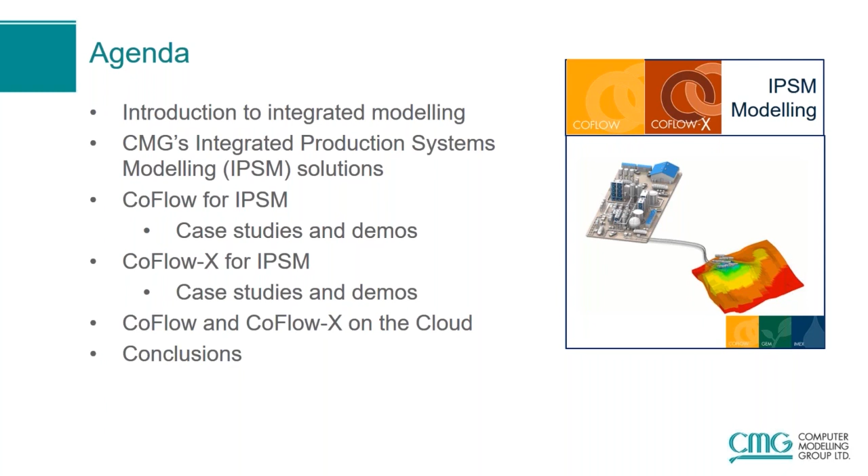I'll present the details of both those software to you, and I'll showcase some demos and case studies while I'm presenting as well. I will talk about the offering of CoFlow and CoFlowX on the cloud, and I will finish up with my conclusions. So first of all, we need to understand, why do we need to do integration at all? Why do we need to incorporate production engineering, facilities engineering, and reservoir engineering all together?

And the reason is that each of these disciplines cannot work in silo. We all need to pass information to each other and get the right data from one another, and then use that for making our production designs or reservoir recovery schemes. We need to transfer the right temperature, the right pressure, and the right fluid information to one another. And that is why we need to do integration. I'll explain this further in the next couple of slides.

So the question to you is, are you considering cross-disciplinary data for your predictions and results? So if there is a production engineer and they are doing an analysis to figure out what is the rate and pressure at which a well can flow at, they would make a plot on the screen. This is a typical plot that is used in an analysis called Nodal analysis. It's a plot between the flowing wellbore pressure and rate. And you can see there is a green line and a purple line.

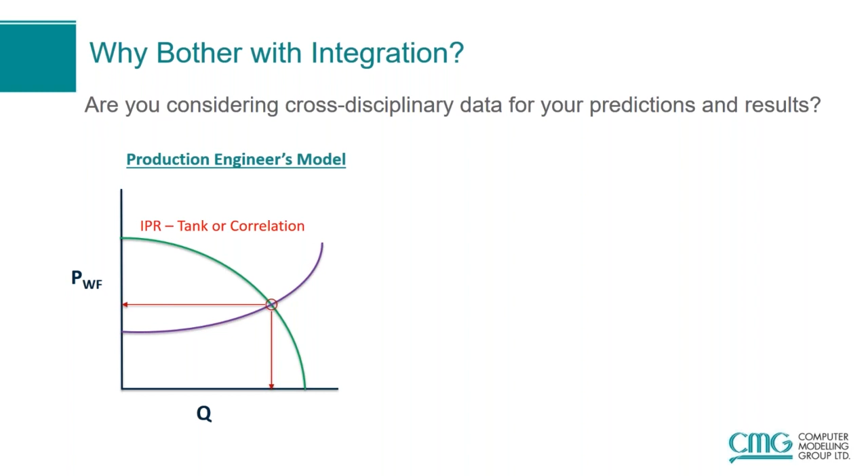The green line is the reservoir response that's coming from the reservoir, and it's called inflow performance relationship, IPR. The purple line is the lift performance that tells you how much your well can lift. So a production engineer would likely have a very accurate description of the purple line, but for the green line, they might be using a tank model or a simplistic correlation, which may or may not be completely accurate. The result of these two curves is the intersection point, and that is the operational point of your well. This is the rate at which the well will flow and the pressure at which the well will flow.

On the other hand, there is a reservoir engineer who is doing his reservoir simulation and coming up with a more accurate green line, the IPR line. But he or she might be using a simpler assumption for the purple line now, which is the lift curve. They might be using a constant BHP, or they might be using some lift tables that were generated for a specific situation of the life of the reservoir.

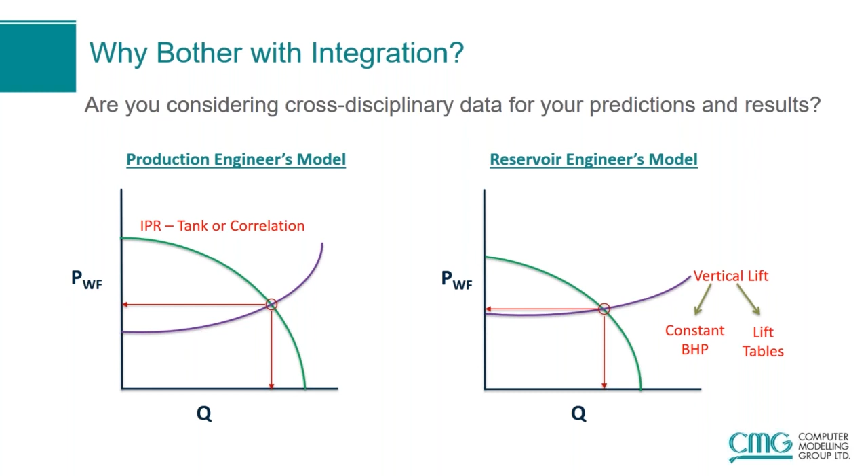So the purple line might not be completely correct. And as a result, the operational point, which is the intersection of the two curves, may not be completely correct. The only way to get the right answers and have some confidence in your forecasts is by integrating the two.

This is when you get your IPR curves from a physics-based model, such as reservoir simulation, and your purple line, which is your lift performance curve, should come from an actual well and facility model. And now you have a correct operating point, and this is what integration is all about.

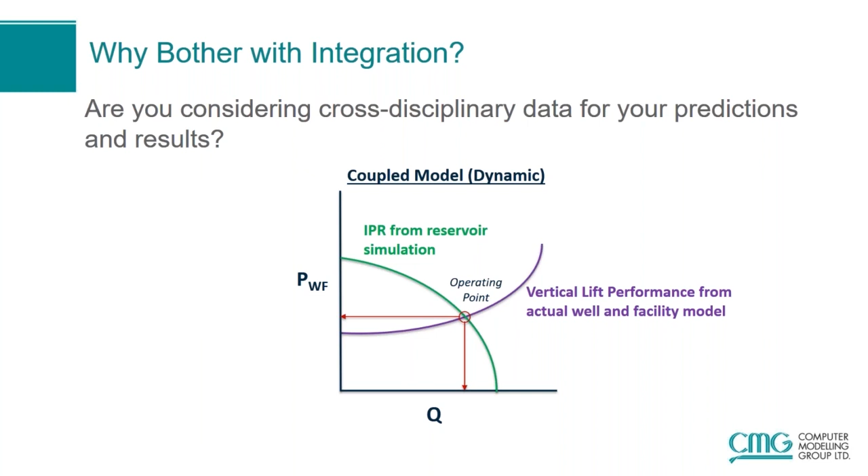So to do the integration of production and reservoir, CMG offers implicit and explicit solutions. Our implicit solution is CoFlow, and our explicit solution is CoFlowX. Depending on your situation, you would use either of the two software. If you want to have an implicit solution where all the solution, the reservoir equations, the well equations, the facility modeling, all of that you want to do in one single software, that's when you can use CoFlow.

It solves traditional challenges faced by other tools that are in the market out there to do IPSM modeling. It has fully integrated uncertainty optimization using CMOST, where you can parameterize anything and really do a robust optimization. And it has multi-fidelity, which means you can simplify anything you want in the whole system of IPSM. So that's CoFlow for you.

On the other side is CoFlowX, where you can just use a CoFlow system for your production modeling and couple existing IMEX and GEM models to it. It is very quick and easy, and you can leverage CMOST AI for a lot of uncertainty assessment and optimization. It is explicitly coupled, which means IMEX and GEM are talking to CoFlow in an explicit manner, and this leads to a very good performance. And of course, all of this is a single vendor solution for all your needs.

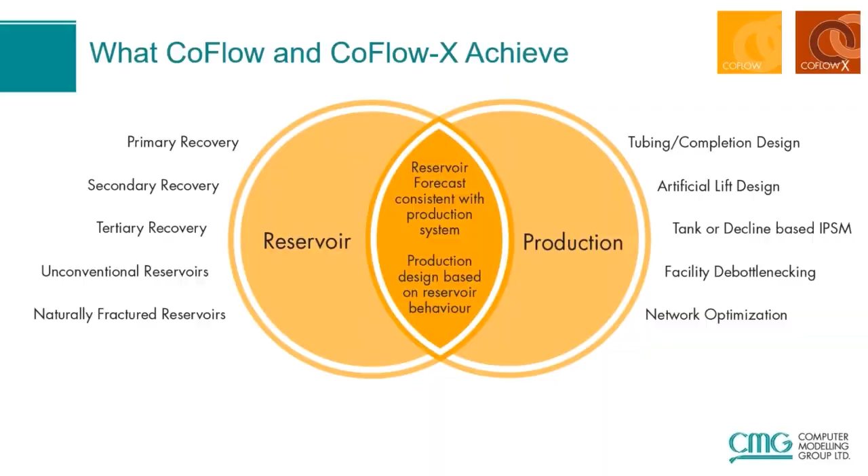So to explain in more detail, I'll go into CoFlow for the next few minutes. So CoFlow is CMG's solution for integrated reservoir and production coupling. It's an integrated modeling environment where multiple users can collaborate with each other. CoFlow was started as a joint venture between CMG, Shell, and Petrobras, and the objectives are to get better engineering decisions, especially for the high stakes plays. And by doing that, we can reduce the cycle time from concept to field.

We can encourage better collaboration between disciplines, and it's customizable software where you can very easily design workflows suitable for your own situation. And by doing all of this, ultimately you can accelerate and maximize your cash flows, and you can optimize your big investments in the field.

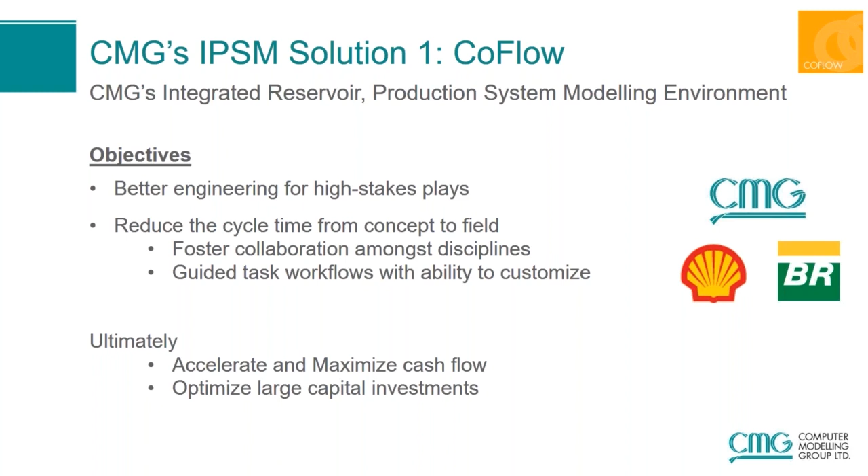We all know now that it's important to integrate reservoir and production systems, but it is not always so easy. It can be time consuming if you're not using the right tools. Typically, it is done by using multiple tools which are made by different companies. So reservoir simulation is on a different tool, production engineering is on a different tool, and the users are generally siloed. The communication between the various disciplines and the various tools is oftentimes ineffective.

There are data management issues where you have file and folder management and maintaining all these different infrastructures in one go. And there are issues with data consistency. For example, the fluid flowing from the reservoir simulator may not be exactly the same fluid that you are using in the production system. So there are issues with data consistency as well.

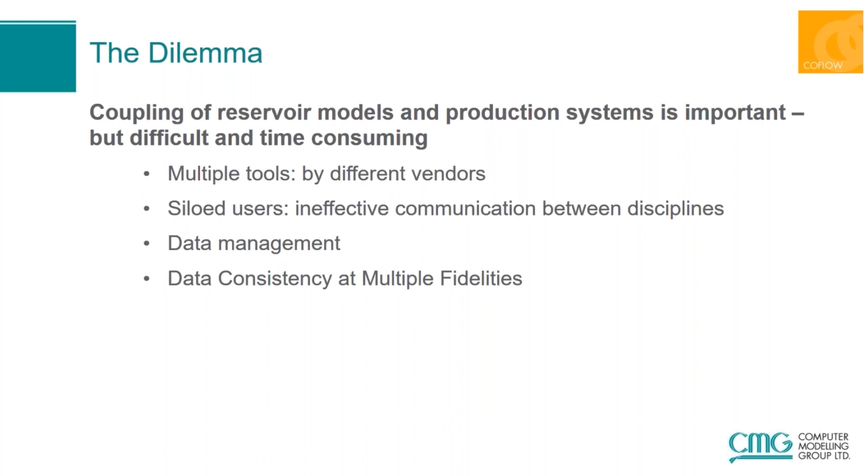So one of the reservoir engineers is using a black oil fluid in their reservoir simulation. Another one is using a K-value fluid. And then geomechanics people are also integrated. They can use compaction tables or real geomechanics. Production people also collaborate in the same system, where they can use the simple reservoir descriptions or use the full description coming in from the reservoir engineer.

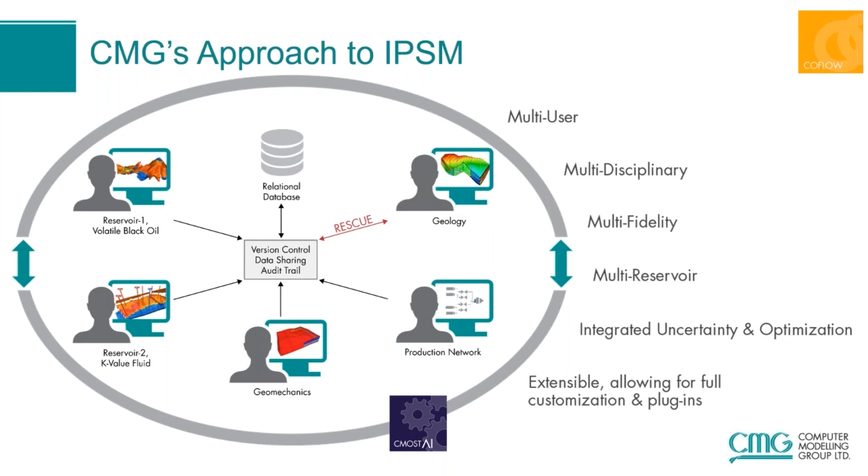And to top it all off, we have integrated uncertainty optimization, where you can parameterize everything from the reservoir to the production facility using CMOST AI, and then leverage all the things that come with CMOST AI. On top of that, CoFlow is an extensible software where you can write your proprietary plugins for your specific scenarios and make it work with CoFlow.

So I will explain more through a case study in CoFlow. This is a case study where we made a model for a pre-salt Brazil reservoir. There are two reservoirs in the system, a carbonate reservoir and a sandstone reservoir. The carbonate you can see on the right hand side is the shallower reservoir, which is appearing in the blue color for permeability. The average permeability is about 500 millidarcy there. It's a heterogeneous reservoir with multiple facies.

And then the bottom reservoir is the sandstone reservoir, which is a more homogeneous reservoir with a better permeability. And together, these two reservoirs have been developed using an FPSO-based development, which has a production limit of 150,000 barrels per day. And both these reservoirs have different fluid systems and different facilities as well.

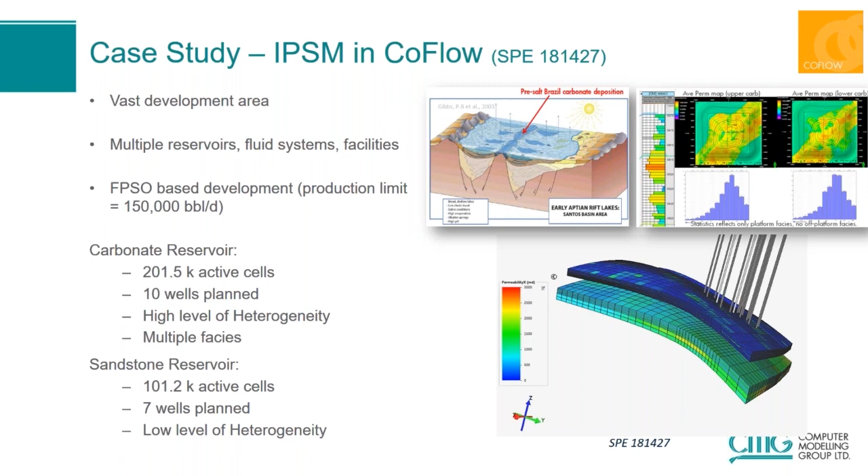So in terms of the fluid, you have the choice of using any fluid type in any of the reservoirs. So in carbonate, I can use EOS, K-value, or black oil fluid, and same thing in sandstone. Then I take this production down to the carbonate and sandstone networks, as you can see. So carbonate fluid goes to carbonate network and sandstone fluid goes to sandstone network. And again, you have choice of using any fluid type. In fact, you can use a black oil fluid in the reservoir and an EOS fluid in the facility if you want, or vice versa.

Then this fluid combines at the FPSO level, which is the red circle here. There, the two fluid systems are mixing with each other, blending with each other, and some processing is happening there. So there we have to use a model of fluid that combines the two fluid systems, and CoFlow does that automatically for you. So on the right hand side, I have the fluid description of the three fluid streams that are flowing in this whole system.

The red line is the sandstone EOS fluid. The dark blue line is the carbonate EOS fluid. And the combination of the two fluid systems is the green line, that is the blend of the two fluids. And this green line is going to be constructed by CoFlow in real time automatically, and you won't have to worry about how these two fluid streams are mixing with each other and how do I use the right properties for modeling my FPSO.

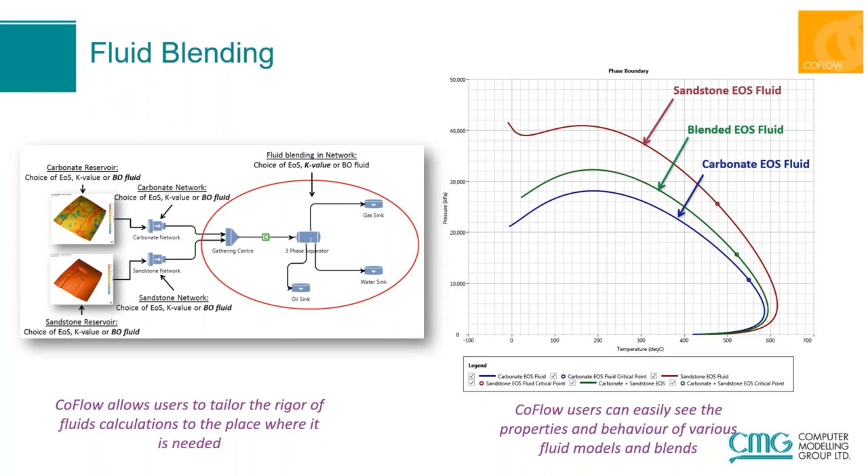Then the next thing you can do in CoFlow is well design and nodal analysis. In this study, we did intricate wellbore design by doing dynamic nodal analysis. In this picture on the right hand side, it's a plot of bottom hole pressure versus liquid rate, and that is coming from CoFlow's nodal analysis, where we are testing the effect of different wellhead pressures or top hole pressures and different tubing sizes. So the black dotted line is the IPR curve coming from the reservoir, and all the other lines are lift curves from the production side.

So you can see that if I use a lower top hole or wellhead pressure, I can have a significantly higher production from this well. And similarly, if I change the tubing sizes, you can see there are two groupings. The top groupings are for the top hole pressure of 25,000, and the bottom groupings are for the top hole pressure of 21,000. And within each grouping, there are three curves, corresponding to three different tubing sizes. So you can do a sensitivity and figure out what is your best tubing size that you can use in this development.

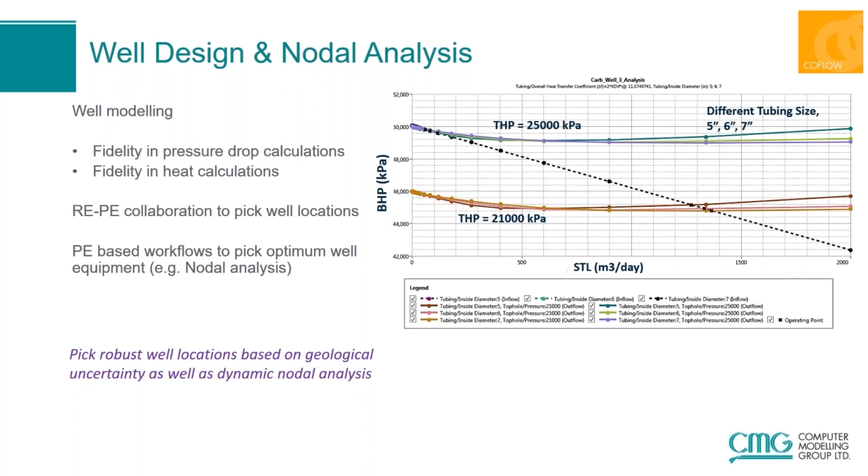Then you can do the facility design in CoFlow. In this particular study, we have carbonate wells flowing into carbonate facility only, and sandstone wells flowing into sandstone facility only. From the carbonate facility, we have a subsea gathering center. There are short pipes that are taking the flow to the subsea gathering center, and then there is a liquid riser that takes the flow all the way to the FPSO. On the bottom side, the sandstone wells, which have bigger productivity, flow into their individual pipes, but these pipes are actually risers that take the fluid all the way to the FPSO directly. So 7 sandstone risers and 1 carbonate riser in this development.

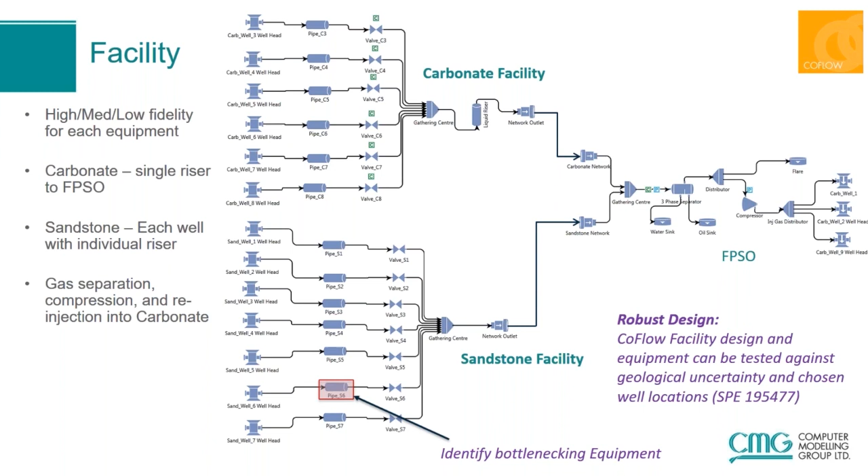So using CoFlow, you can identify bottlenecking equipment. For example, the pipe S6 here is a bottlenecking pipe, and you can try to do some debottlenecking by using a different pipe size and things like that. You can also do a robust design by incorporating geological uncertainty within your production design. So now I'm going to go to my CoFlow demo.

And here is my CoFlow model, the two reservoir system that you see. The shallow reservoir is the carbonate reservoir, and the deep reservoir is the sandstone reservoir. So this is the CoFlow interface for you. I can start from the left-hand side. You can see there are multiple users collaborating on this study. I have my asset study, and then there is this user, the name is demo. And then there are two more team members, Fred and Jane.

I can see what Fred is doing, and I can see what Jane is doing, and I can grab their information from their data that has been checked into this database. So whenever you are working in CoFlow and you're happy with what you're doing, you can check in your results, and your team members can then see the results. And it doesn't matter where the team members are. Fred can be in South America and Jane can be in Europe, and I can just work together with them very easily. I can also give permissions to various people to just view the studies or write permissions and so on.

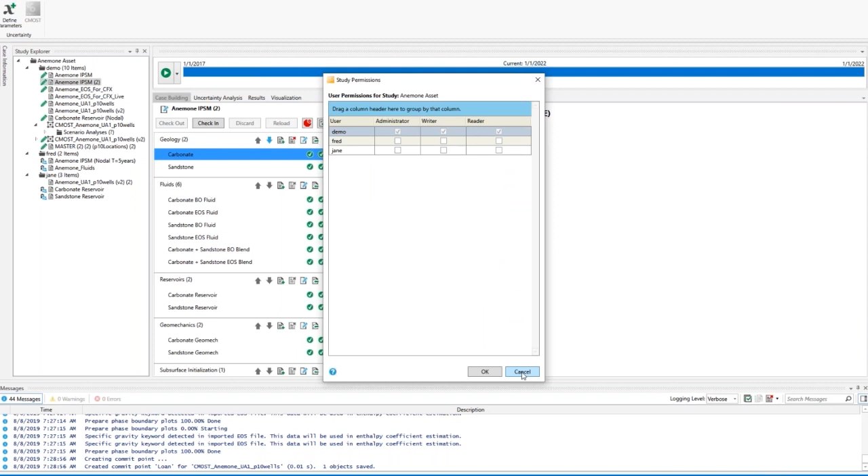So first thing you see in CoFlow is your geology. You've gotten the geological model and everything is set up correctly. And then you go and design your fluids. In terms of fluid, CoFlow can handle every single fluid system. You can have black oil systems, K-value systems, or equation of state systems. In this case, Fred has done some work on fluids. So you can see he has designed the black oil fluid system, the EOS fluids, and the combination of the two.

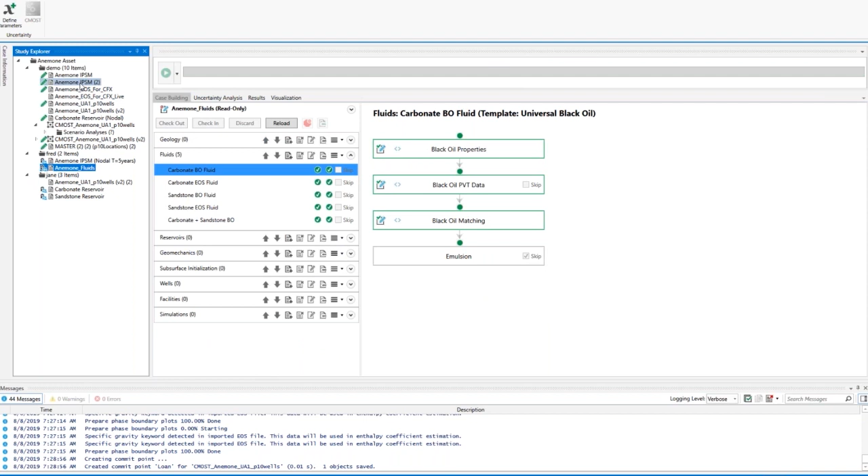I got that information from Fred. So now I have a carbonate fluid described in black oil format as well as compositional format. And same thing for the sandstone fluid. And then I have created blends of the two fluids, the carbonate and sandstone black oil blend and the carbonate and sandstone EOS blend. And then I can go and look at the quality of my blends.

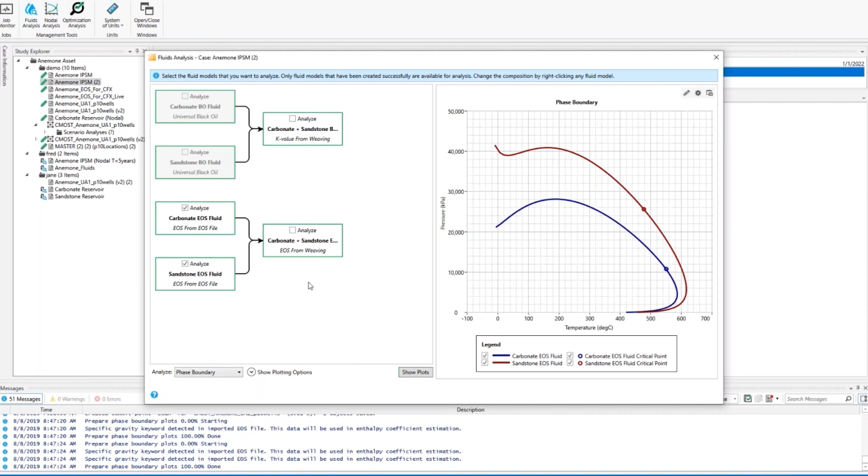So here is my carbonate EOS fluid PT phase envelope, and the sandstone EOS fluid PT phase envelope. And if they were to mix in a 50-50 ratio, this is how the combined fluid would look, the green line that appears. And this green line will be managed by CoFlow in real time automatically in the facilities, depending on what ratio the two fluid streams are coming into the facility.

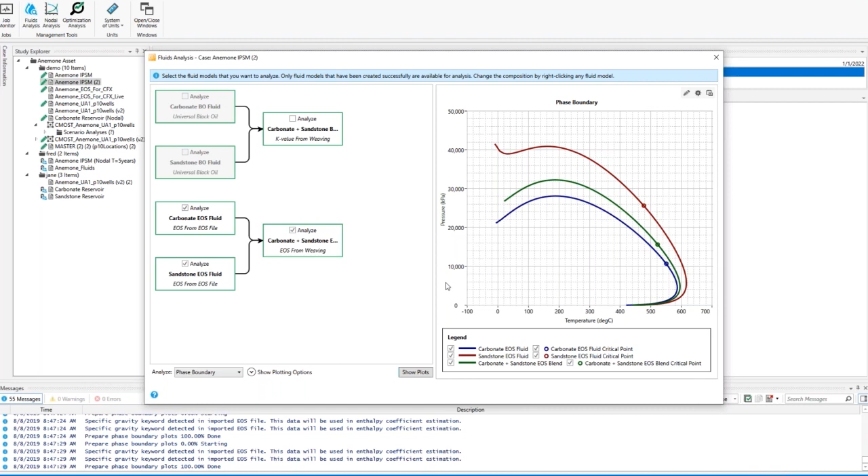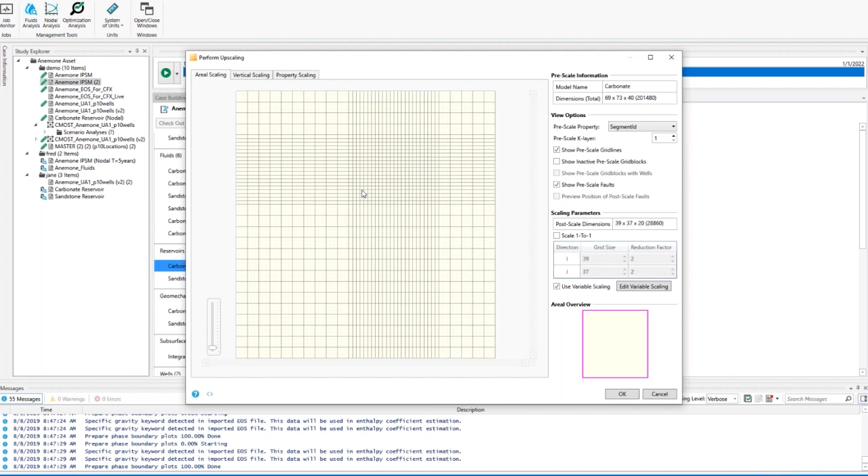Then I go ahead and do my reservoir engineering. I set up my reservoir model. And one good thing about CoFlow is you can simplify the reservoir model or you can use it at the full resolution. So you can use a discrete reservoir or you can use tank and decline curves. Or you can take the base refined model coming from the geologist and upscale it within CoFlow. So here you can see I have upscaled my reservoir everywhere except the area around the wells. So the central area is not upscaled, but the area away from the wells has been upscaled.

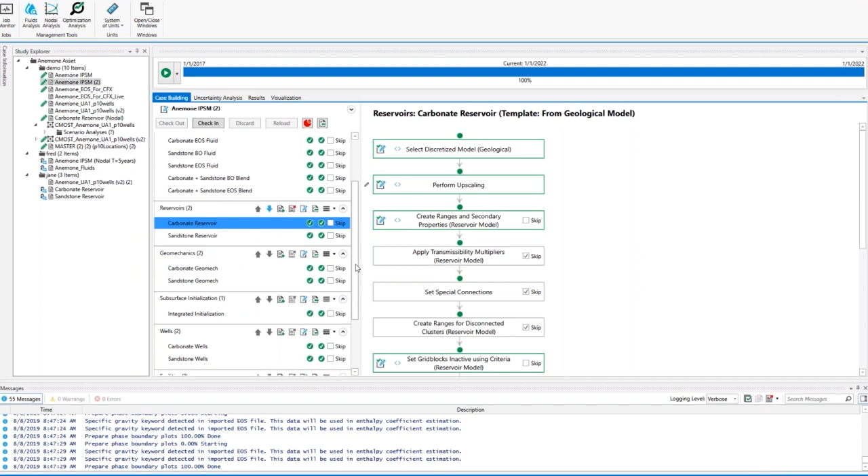And then I can go ahead and do geomechanical modeling, which is compaction tables or full geomechanics, and then set up my wells. So my wells can be described in all their details. I go in and I specify the type of wells and where they're located and other properties in the wells as well. Here, one thing that would stand out is this table at the bottom. This is the ambient temperature table. That's the temperature outside of the well, below the sea floor. So this gives me the ability to do correct modeling of temperature losses, which is very critical for the offshore environment.

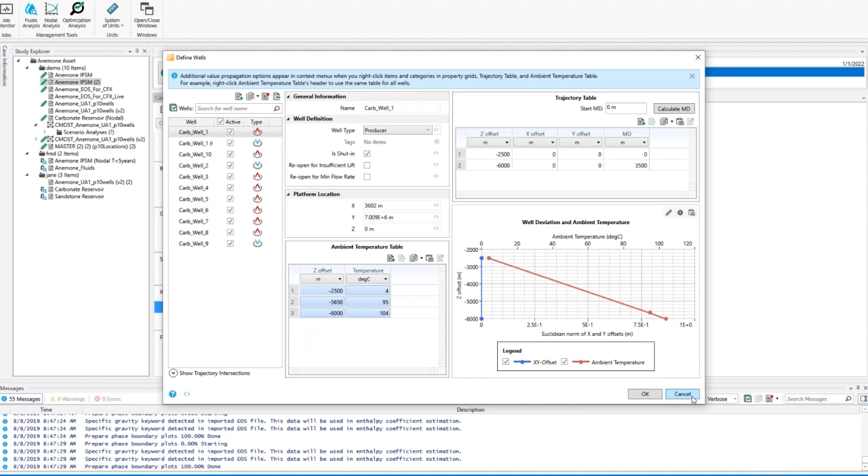In terms of the tubing size, the size chosen is 6 inches, and that is done based on nodal analysis. So I'll show you that next. So that was done by grabbing the carbonate reservoir model from Jane and then running nodal analysis on that. So you go to nodal analysis and you generate one and evaluate tubing sizes and top hole pressures.

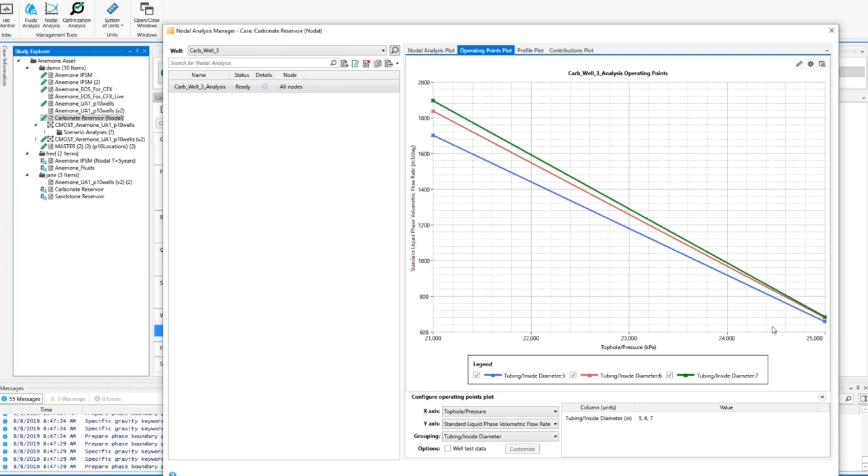But if you just pick one top hole pressure, for example, 21,000, you can see that the production can increase from about 1700 to maybe 1850 using a 1 inch bigger, like 6-inch tubing instead of 5-inch tubing. But going from 6-inch to 7-inch doesn't give you that much of an increment, and 7-inch can be much more expensive than 6-inch. So we decided that we will go with a 6-inch tubing for our base design.

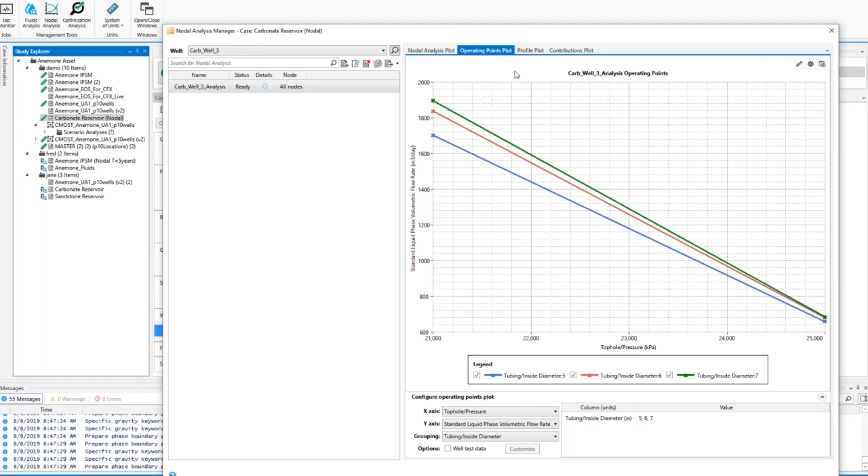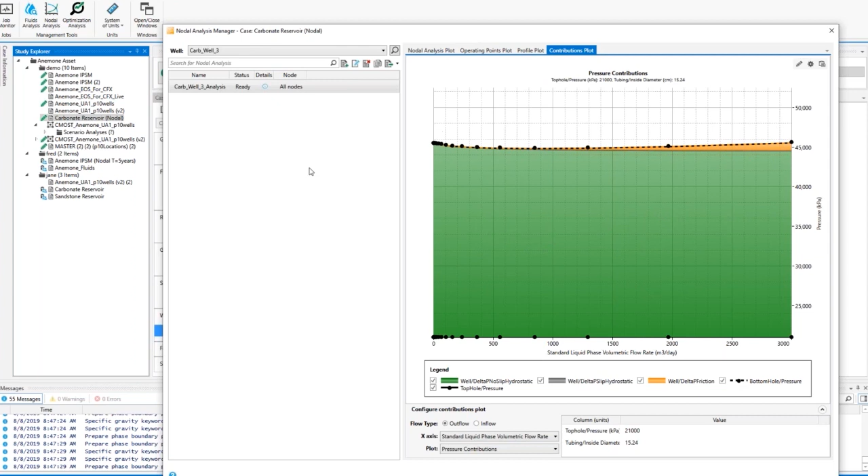You can also look at the contributions of pressure coming from various sources. So this picture shows you that most of your pressure drop is coming from hydrostatic, because these are mostly vertical wells, and some of the pressure drop is coming from friction. So based on this, we conclude that we will be using 6-inch tubings for all our wells.

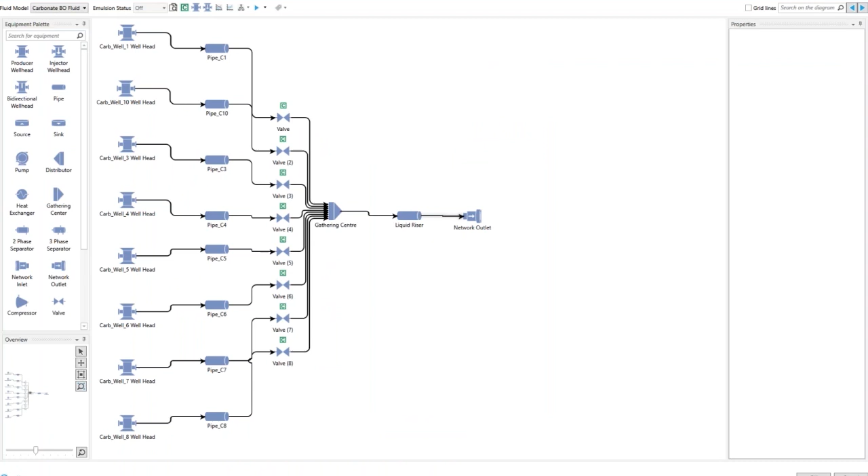Continuing on to the facilities, we have the Carbonate facility, where you have individual wells flowing into small pipes and then subsea gathering center, and then the fluid goes into a liquid riser. So let's look at the riser. The riser here is a J-shaped pipe, and again, you're doing all the pressure drop calculations and all the temperature drop calculations right from the sea floor to the FPSO.

So the water depth is about 2.5 kilometers, and this particular well is located about 700 meter horizontal distance from the FPSO. At any segment in the pipe, you can change your correlation and use a different correlation if you want. There is a choice of correlations available to you in CoFlow.

On the sandstone field, each pipe taking the fluid from the well to the FPSO is a riser. And the shape is a bit different because it's a longer riser, and you have to account for the weight of the pipe that's applied onto the FPSO. So we use a lazy wave profile. And once again, all the pressure drop calculation and all the temperature drop calculations have been done.

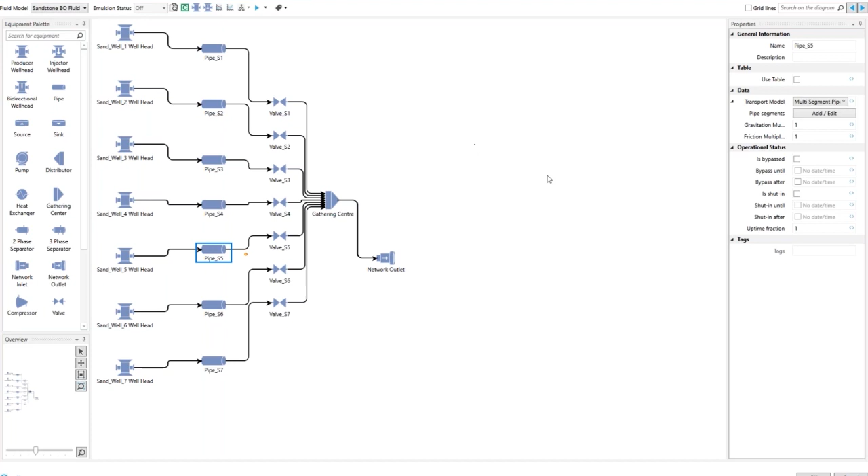So one thing to notice is the fluid model being used in sandstone facility is sandstone fluid, and in the carbonate facility is the carbonate fluid. So in the integrated facility, that is the FPSO, the fluid is the blend of the two fluid systems. And the properties of this blend are going to be calculated in real time by CoFlow, and it will be automatic.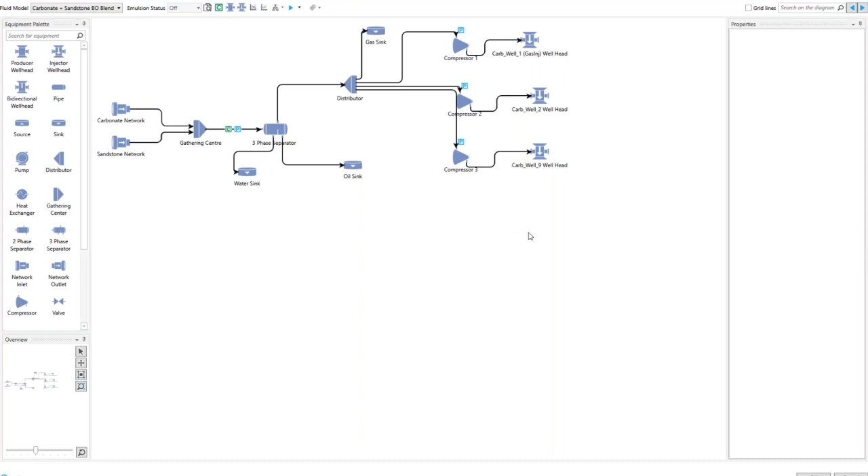In the FPSO, what we are doing is we have a single stage separation. We have a constraint of production, and we are separating the water and oil and then sending the gas to a distributor, where some gas goes to sales and fuel and flare, and remaining gas is sent to injection wells using compressors. Okay, so that is what we are doing in this study, and we are doing an optimization as well.

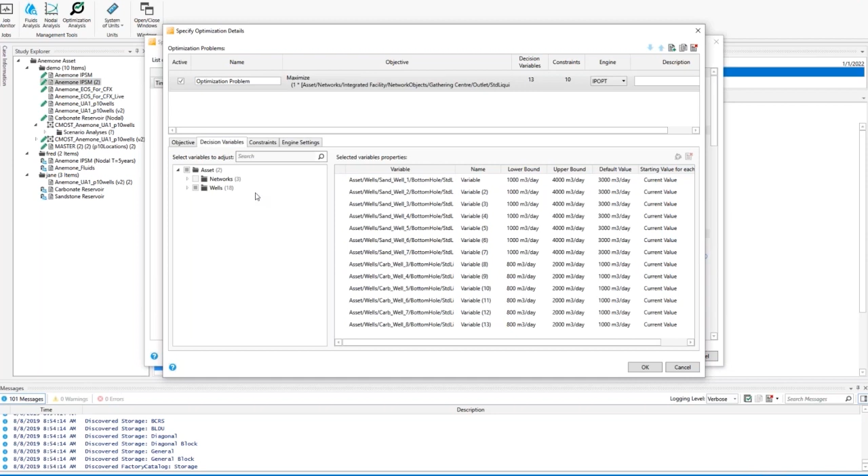So in this particular study, we want to optimize our production that's coming in at the FPSO. So I'm trying to maximize the liquid production or the oil production at the FPSO using a decision variable on my wells. So I'm going to produce my wells at a particular rate that is determined by the optimizer, such that I can elongate the life of the well and life of the field and just maximize the production to the maximum capacity of the FPSO.

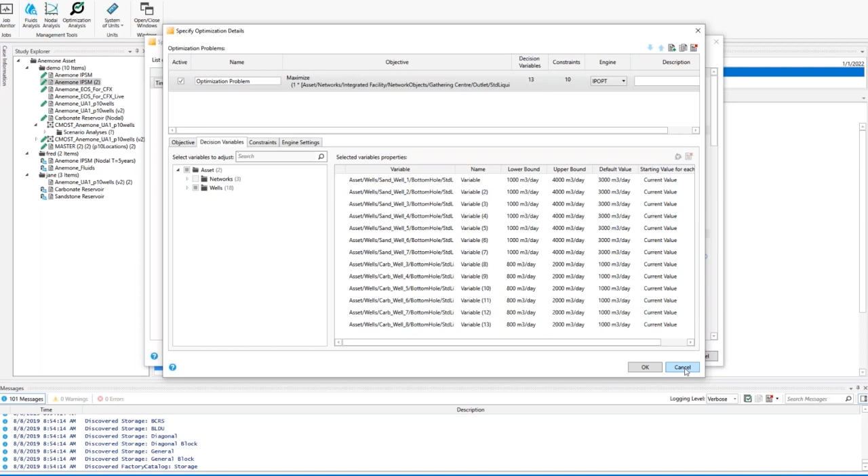So this optimization is going to be done as often as I want. I can do it every month, I can do it every 6 months. And then we can look at the results within CoFlow as well.

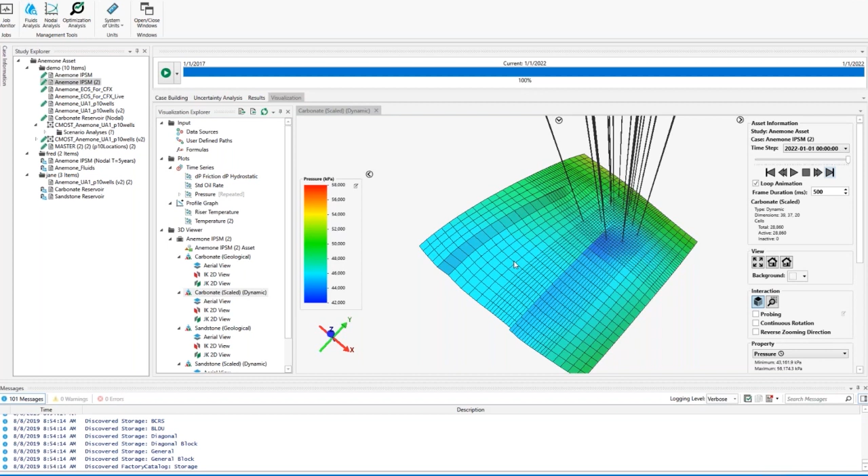So let's look at the geological model of Carbonate, and you can see that it's a low permeability system, and you can see the refinements on the grid here, and the dynamic model, which is after upscaling. You can see that it's been upscaled in the areas away from the wells. And you can see that the pressure drop is quite significant around the wells of Carbonate, so that's why we are doing a gas reinjection scheme.

In terms of results, you can look at the oil rate coming from the two facilities. So the Carbonate facility is only producing about 5 to 6,000 meter cubes per day, and Sandstone facility is producing about 18,000 meter cubes per day. So most of the production is coming from Sandstone and some from Carbonate. So maybe 30% is from Carbonate.

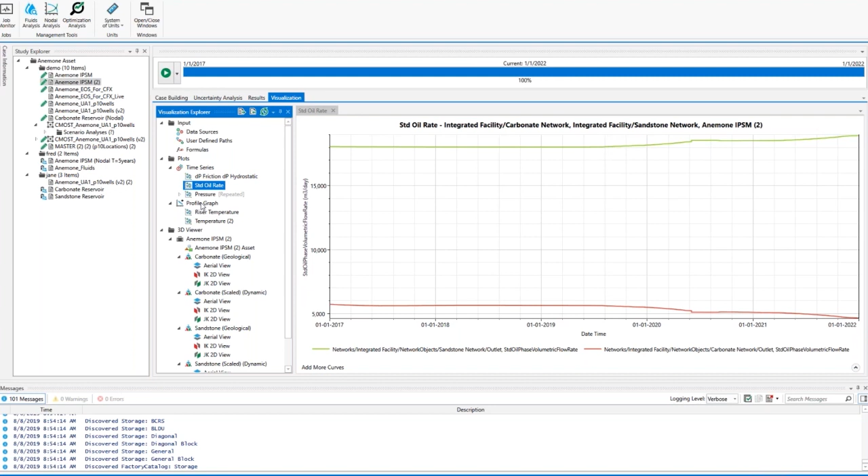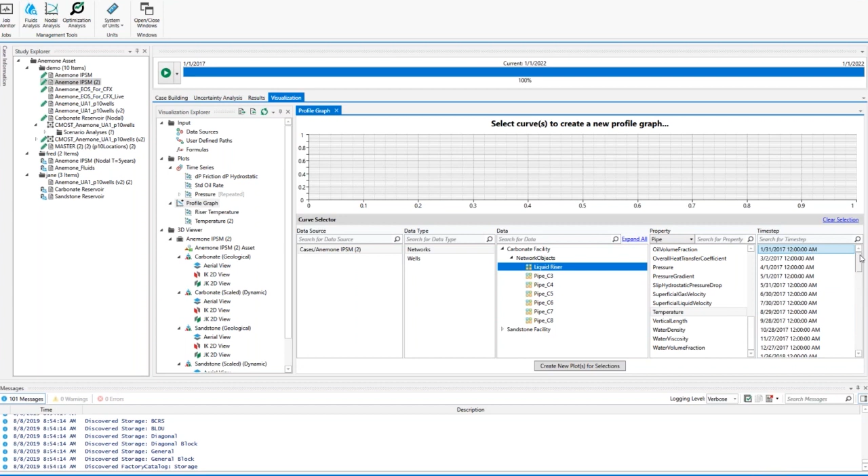You can look at some flow assurance properties. So you can create a profile of the temperature inside your Carbonate riser. And that is very important because you don't want to get into low temperature systems where hydrates and asphaltenes can deposit. So I'm going to plot temperature inside this pipe at 3 different times, one at the beginning, one sometime in the middle of the simulation, and one towards the end.

And CoFlow will create this plot for you, and then you can evaluate how the temperature is varying inside the pipe. So on the x-axis is the length of the pipe, on the y-axis is temperature inside the pipe. And you can see we begin at a fairly good temperature, about 52 degrees Celsius at the sea floor. So remember, the wellhead is at the sea floor. It's a wet wellhead. And by the time 2,500 meters or 3,000 meters are done, which is at the exit of the FPSO, the temperature has dropped to 34 degrees.

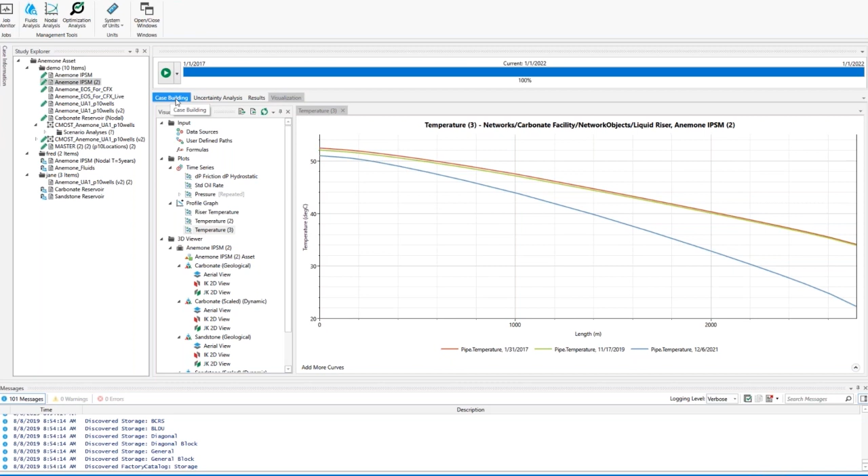So that goes on for the first couple of years. But in the 4th year, we can see the temperature has dropped quite a bit at the FPSO. So it's 22 degrees now at the FPSO, and that's a little cool, and it can lead to asphaltene and wax problems. So basically, CoFlow can use these results to do some action and prevent the temperature from dropping too much. So that is all you would do in CoFlow, and our base case has been created now. So I'll go back to my presentation, but before that.

Before Varun goes into the next session, I'd like to ask a question to the audience. Soon you'll see a question pop up on your screen, and you can select one of those options and click respond. So the question is, what are your main challenges while doing IPSM modeling? The options are data consistency between reservoir and production models, difficulty in coupling reservoir and production models, lack of ease of data exchange across disciplines, and all of the above. We'll give a few seconds for everybody to respond. And the responses are coming right here.

Around 18% of the people who responded believe that data consistency between reservoir and production models is an issue. Around 20% say coupling is difficult between reservoir and production modeling tools. Around 15% say lack of ease of data exchange, and the majority say it's all of the above. And I agree. Depending on the tools that you're using and depending on consistent data usage between different disciplines, and one of the most important ones is the fluid consistency used between the reservoir models as well as the network models, or the well analysis models.

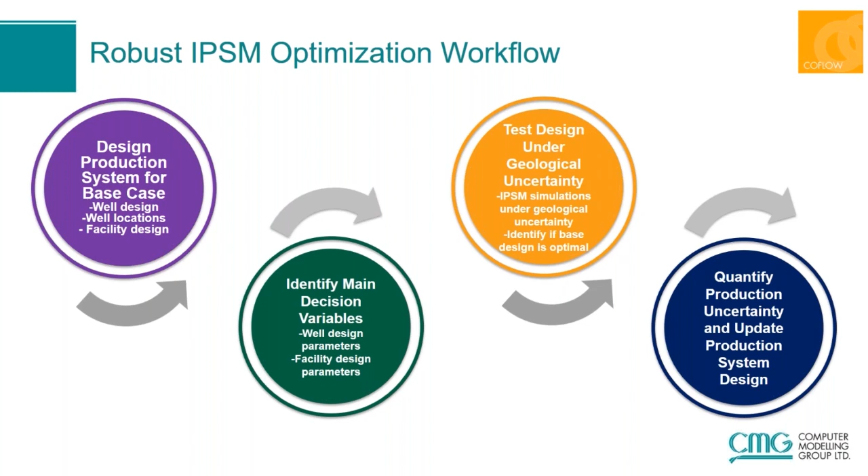But we can only pick one when we go into the field. So which one do we pick? So that's another question to ask. Then the tubing ID and tubing insulation, we tried to identify that using nodal analysis and we picked a 6-inch tubing size. But is that optimal for all the uncertainties that there are? Do we need artificial lift? Should we try using a pump or should we just leave the wells to flow naturally?

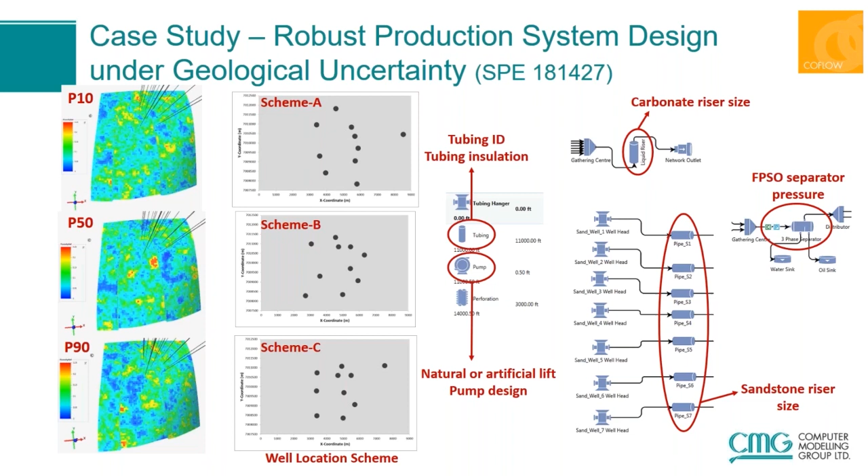Then on the facility side, the carbonate riser size can be uncertain. We can try different riser sizes for different geological realizations and see which one is the best. And same thing goes for the sandstone riser size. And lastly, the FPSO separator pressure has been picked as a starting point for one realization. But does it work for all the realizations or not? So we can do all these analyses in CoFlow. And that is my next demo.

So what I can do in CoFlow is I can very easily bring in geological realizations that are coming from geologists and set them up in CoFlow and then set up my reservoir model accordingly. And then within the wells, I can parameterize the entire reservoir. So instead of associating the well with realization 1, I can do it to realization 2. So I'll show you an example of carbonate well 10 here. You can see that this particular perforation corresponds to the carbonate P90 realization. And at the same time, all the wells in carbonate are corresponding to the carbonate P90 realization.

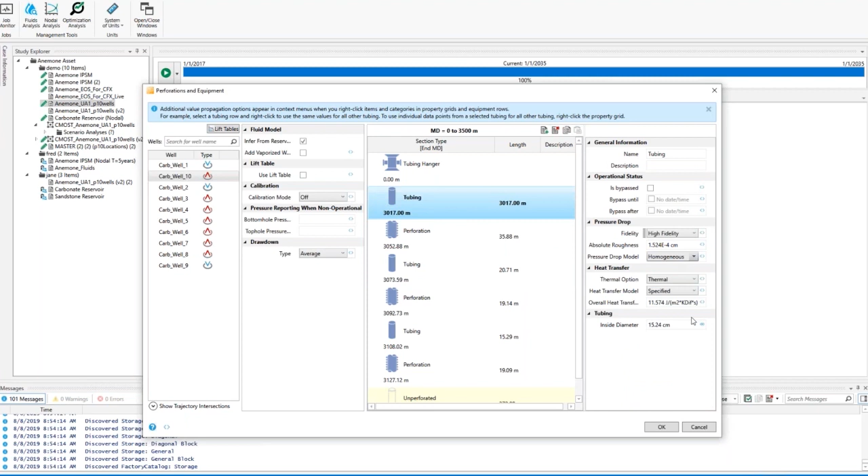But I can parameterize the whole reservoir. And I can say that I may not be using the P90 realization. I may be using P10 or P30 or P50 or P70 or P90. I gave them equal weightings because I don't know which one is better. But if you have some distribution which you want to use, you can use that just like you would do it in CMOST. So my entire reservoir is a parameter and all the wells would be using one or the other reservoir when we do optimization analysis in CMOST. Similarly, my tubing size is a variable that I can test. I have a choice of using 6-inch, 5-inch, or 7-inch tubing sizes.

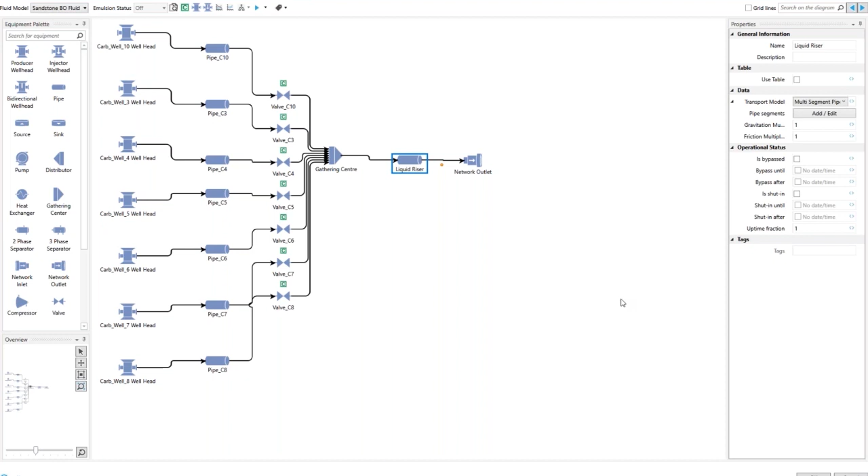Then I go ahead into my facilities and I parameterize my entire facility as well. So in case of the carbonate facility, I can make either one of the equipments a parameter, or I can parameterize the whole system. I am not forced to use a single gathering center facility, for example. I can completely change my facility and use that as a parameter. In this case, I have parameterized my liquid riser size. So I'm using 6-inch carbonate riser, 8-inch carbonate riser, and 10-inch riser. And I can specify the whole facility diagram as a parameter.

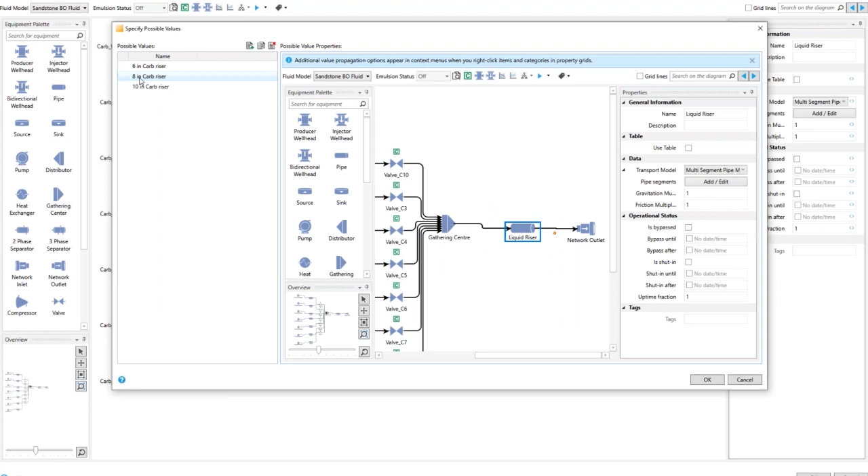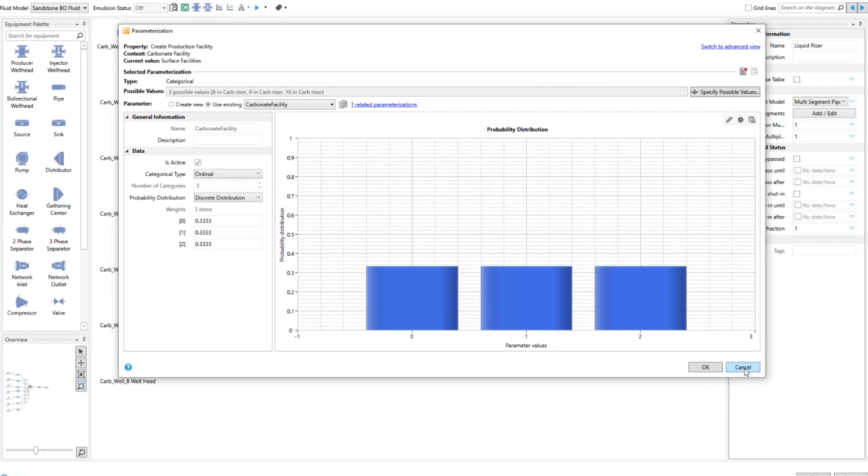So here you can see that I'm using a different liquid riser size for each realization. This is the 8-inch that's coming up, and you can see that it's 8-inch diameter here. So we have 3 different settings for carbonate riser that we are testing out.

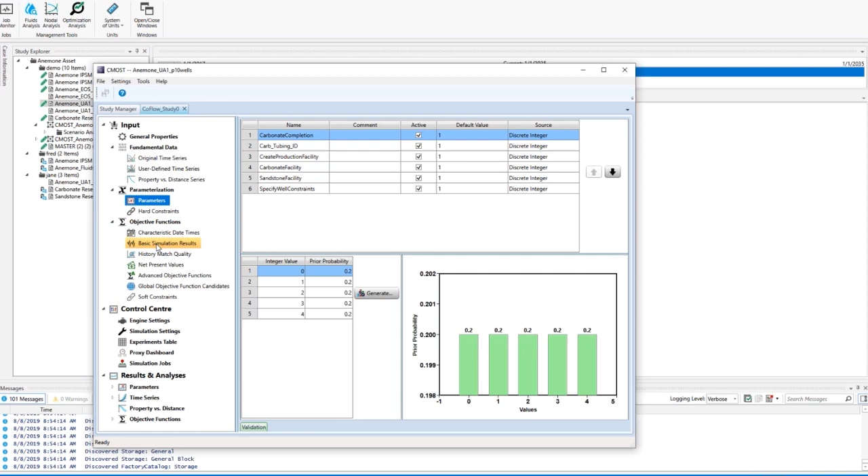And with that, I make all my parameters and then I can just go into CMOST and do my CMOST analysis. So CMOST will know what my properties from the facility are. CMOST would know what my parameters are. And I have set up 2 objective functions, cumulative oil from carbonate and cumulative oil total, and I'm trying to maximize it using CMOST. And I'll present their results in my slides next.

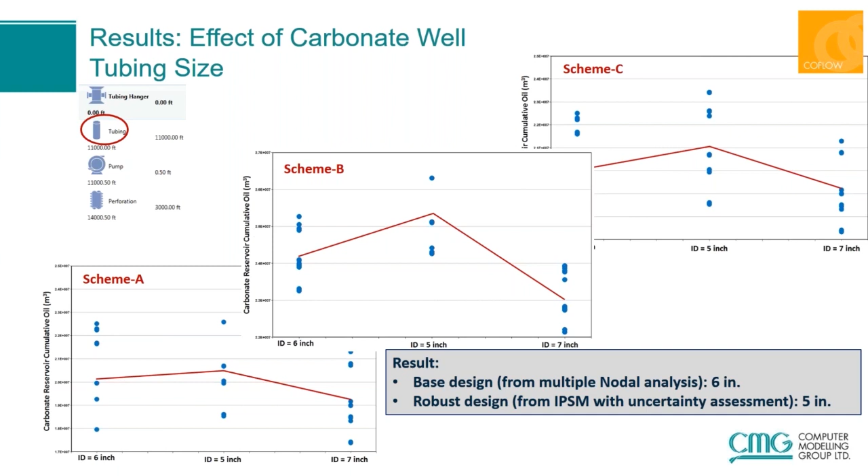Now remember, in nodal analysis, we concluded that 6-inch tubing is the best tubing size to use. But when you run a fully coupled integrated system with uncertainty included in it, you realize that you would have made a mistake if you would have gone in with a 6-inch tubing size. So we changed our design, and now we are going to go with the 5-inch tubing size instead of 6-inch. On top of that, it could be cheaper as well. So it's a double benefit.

The next thing we evaluated was the effect of using artificial lift. So we had a choice of two pump designs from two manufacturers. So there is pump 1 that's here, and there's pump 2 that's here. So again on the y-axis we have cumulative oil production from carbonate, and on the x-axis is the three different groupings for pump 1, pump 2, and natural lift. And we had designed our base case using natural lift, but while using pump 1 we realized we can increase the production significantly, and also with pump 2, but pump 1 was better than pump 2.

And then we can now decide whether we want to go with a pump in the wells or we want to keep going with natural lift. The data is in front of us. Logistical issues may have to be addressed, and we'll address it separately.

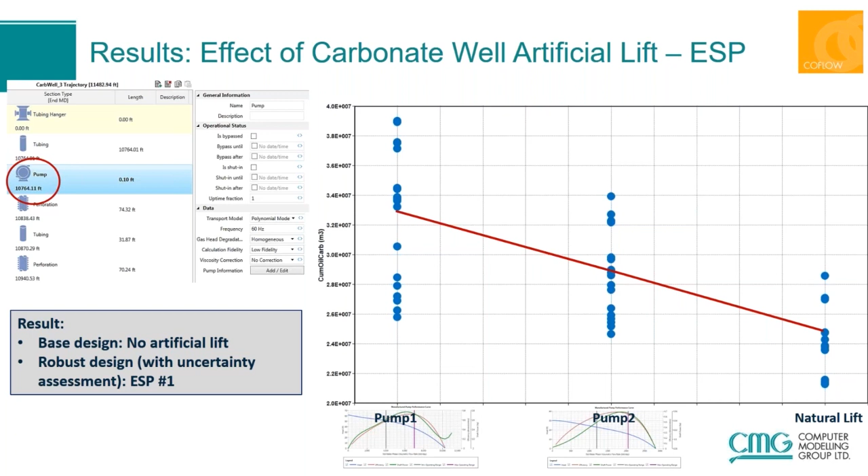The third thing was the effect of carbonate riser size. In the base design, the carbonate riser was picked as a 6-inch riser, and you can see that if I was using a 6-inch riser, my production would be quite low. If I would increase the riser size to 10-inch, it increases production, but it's still not optimal. But using an 8-inch riser was the best design, and that came from CMOST as well. So we changed our design to be using an 8-inch riser.

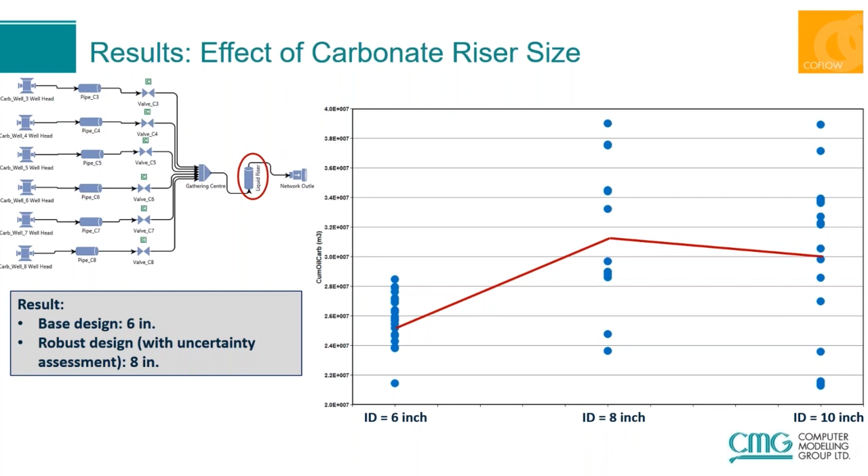And then lastly, we want to look at the effect of sandstone wells riser size. So here our base design was 6-inch, and after doing all the uncertainty assessment, we realized that 6-inch is still a decent pick for the risers of sandstone. So we continued to go with a 6-inch riser in sandstone.

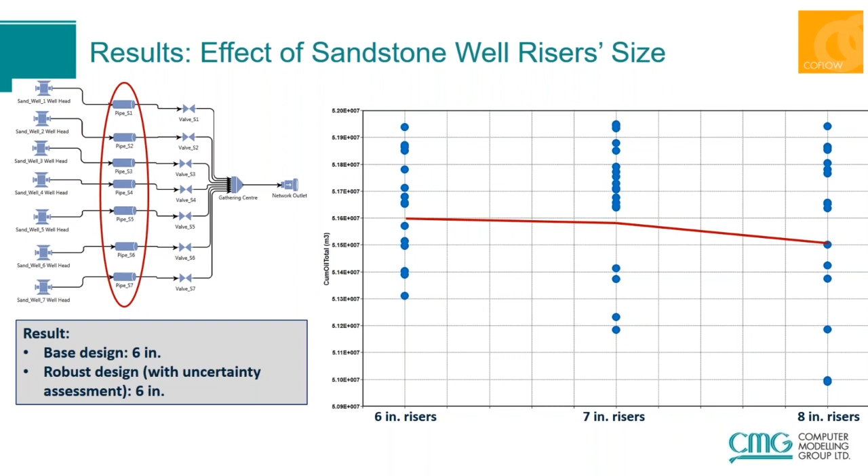So with that, we have done a full analysis of our system. In a traditional system, you would be doing reservoir engineering on one tool, production engineering on a second tool, geomechanics on a third tool, and uncertainty optimization would be completely decoupled from the system on a different tool. And there would not be any feedback going from reservoir into production or from production into reservoir. We would be just flowing information one way.

There's lack of communication. Now, with the modern solution of CoFlow, we have coupled everything together. The reservoir models can be done in different fluid systems. Geomechanics and production engineering can be done on the same system as well. Everyone is contributing data to the same database, and we have integrated the uncertainty and optimization all together with CMOST, end-to-end uncertainty assessment optimization.

So at this time, I'd like to ask another question to the audience, and similarly, a question will pop up on your screen. The question is, what process can you use integrated production systems modeling for?

And some of the options that we can think of and are on the screen is tubing selection, artificial lift design for unconventional reservoirs, because you see a lot of flow assurance and lift issues in those kind of reservoirs, slugging effects and things like that. Production and injection optimization for miscible EOR processes, compressor design for gas fields, or any of the network facilities design, or all of the above.

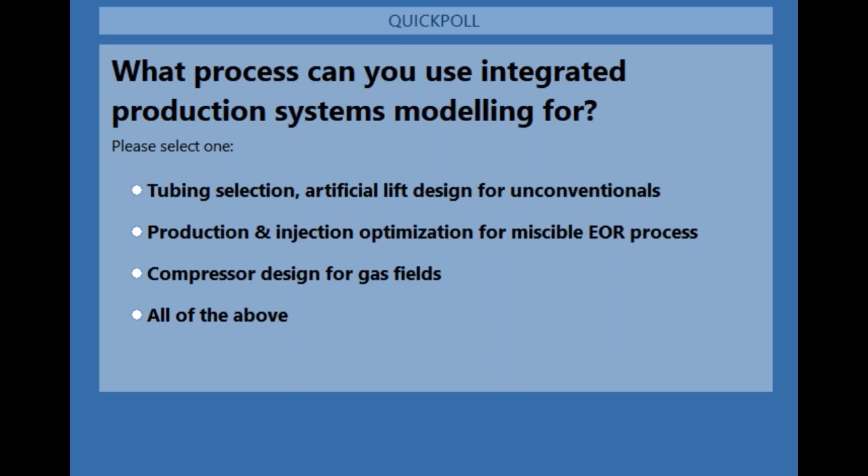Okay, thank you everyone for their responses. Now I'll go ahead to our next system, and that's CoFlowX. So far we talked about CoFlow, and now the next few minutes will be devoted to CoFlowX. So what is CoFlowX? CoFlowX is CMG's second solution to your IPSM problems. Now you can couple CoFlow production engineering system, the wells and facilities of CoFlow, to existing models of IMEX and GEM. And the coupling tool is CoFlowX.

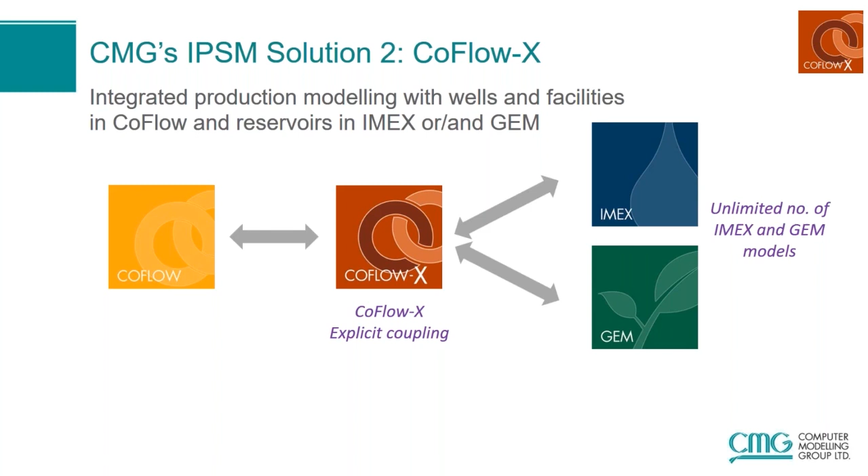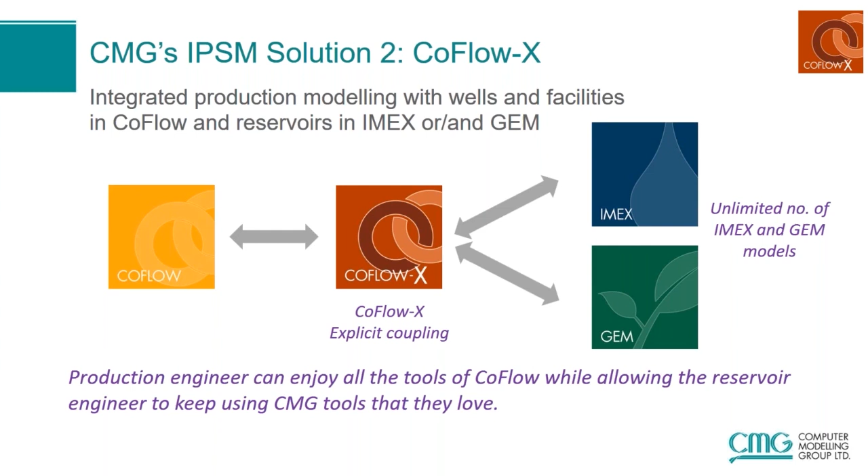So CoFlowX provides an explicit coupling between IMEX, GEM and CoFlow. And there is no limit on how many IMEX and GEM models you can couple to CoFlow. By doing that, the benefit is that production engineers can enjoy all the tools of CoFlow in terms of wells and facilities, and the reservoir engineer can keep using the CMG software, the CMG simulators that they love.

The benefits of using CoFlowX is that you leverage the power of industry's leading simulators, IMEX and GEM, for the best performance in simulation that you can get. And you can model any complex recovery process, unconventionals, chemical EOR, natural fractures, geochemistry, anything that you can model in IMEX and GEM. And then you can couple CoFlow, which is the main benefit. You can couple the production engineering system, and you can also leverage the power of other CMG software like Builder and CMOST AI. So you can do all of these things using CoFlowX.

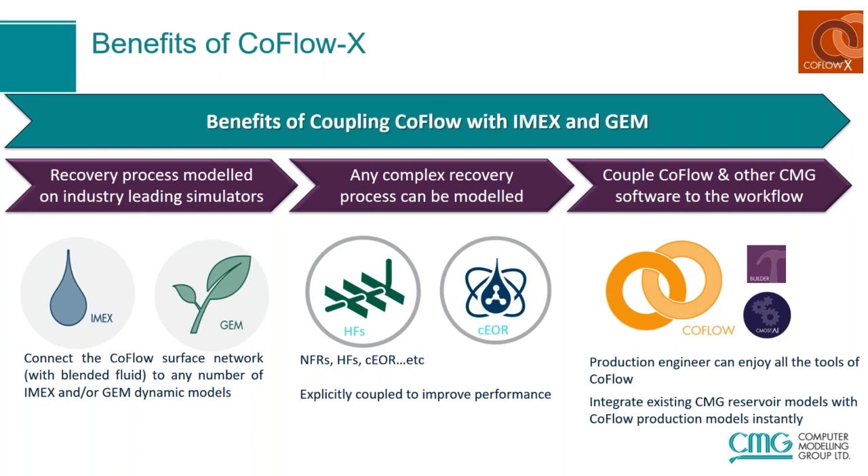The concept how CoFlowX works is there is a communication between IMEX, GEM and CoFlow, and this communication is handled by CoFlowX. So after every certain amount of time, which is called handshaking time or the coupling time between reservoir and production, at the coupling time, there will be information that will be passed from reservoir simulators to CoFlow. And this information is in green on the right side. That information is IPR curves, the mole fractions coming from production wells, the drawdowns, the reference phases, and a suggestion for the next coupling time.

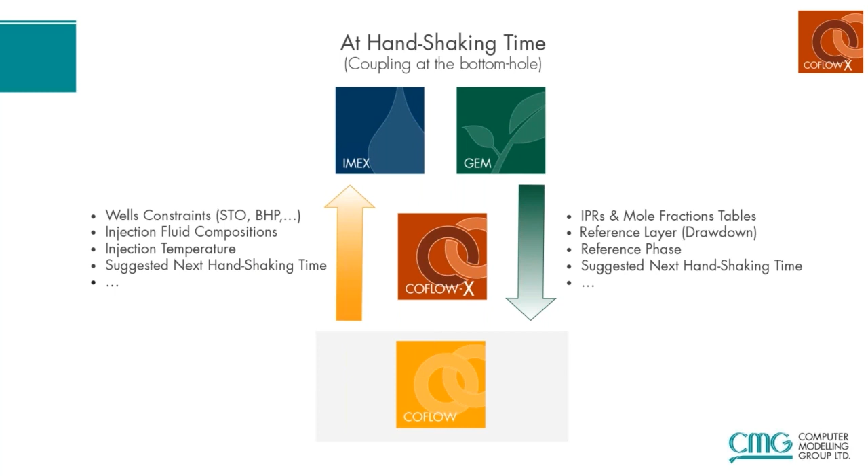Then CoFlow does its calculations, the wellbore calculations, the facility calculations, and it identifies the operational constraints, and then it transfers some information back to IMEX and GEM. The information that is transferred back is on the left-hand side. So it transfers the well constraints, the constraints at which the wells can actually flow at, depending on the facility limits and the well limits. It transfers the injection fluid compositions back to reservoir simulators, the injection temperatures, and another suggestion for the next coupling or handshaking time. And CoFlowX is very smart in identifying the next suitable coupling time.

It looks at the user-defined handshaking frequency, the picture on the left side, that's coming from CoFlowX. The picture in the middle is showing the suggestion of this coupling or handshaking time made by IMEX and GEM, depending on the events happening during the simulation. And the picture on the right is showing the suggested handshaking time by CoFlow, depending upon the events that are happening inside CoFlow, inside the production system.

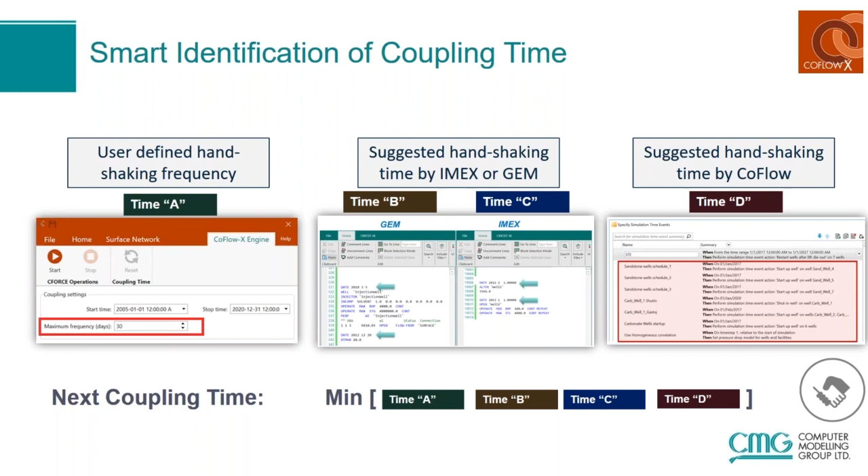So you have events happening in reservoirs, events happening in wells, events happening in facilities, and then there is a setting by the user. And CoFlowX goes and picks the best suitable setting for the next handshaking time by picking the minimum of these numbers. And these numbers can actually be dynamically changing. And CoFlowX will go and smartly pick the best number for handshaking so that your results are not compromised. And I'll repeat the same case study in CoFlowX now.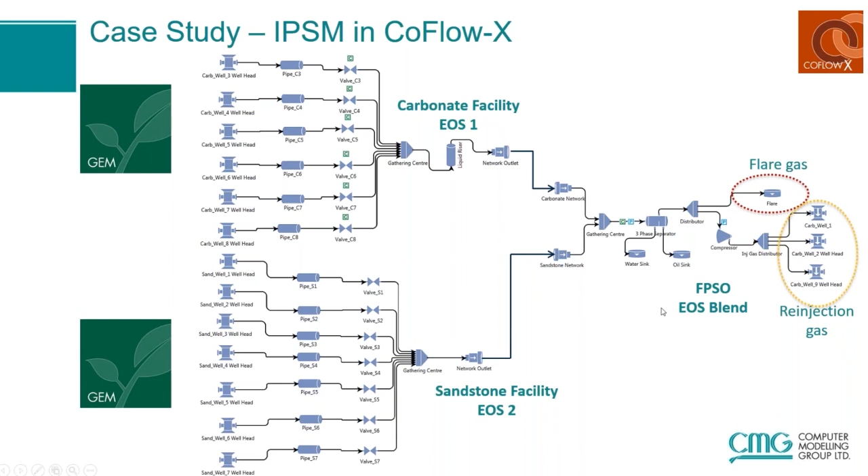So two different EOS systems are going to flow into the facility, and the blend of the two will be used for our FPSO. So that's my next demo, and I'll go to CoFlowX for that. So this is CoFlowX's interface, very user-friendly interface. CoFlowX is the coupling between the surface network that's in CoFlow and reservoir models that have not been set up right now. So I'll be doing that.

Very easily, you can pick your surface network properties. We have already picked my surface network, and CoFlowX has identified the wells automatically and identified which wells are injectors and which are producers. But they are not yet coupled to any reservoir wells because the reservoir models have not been added yet. So next thing we'll do is we'll add some reservoir models.

So I'll go here and I'll add two reservoir models, the Carbonate reservoir, which is in GEM, and the Sandstone reservoir, which is also in GEM. I can just select both of them and couple them into my system. Very quickly, it will get all the information it needs. And automatically, you saw if the well names were matching, it couples the well names of the reservoir to the well names of CoFlow very easily.

And if I change something in my reservoir, I can go and add new wells or define something new in my reservoir. Then CoFlowX can identify that also very easily. In the next step, I'll show you that. So let's say I go and rename the reservoirs. So one is Carbonate and one is Sandstone. Then I can go to the well coupling tab. The couplings are still present just the same way.

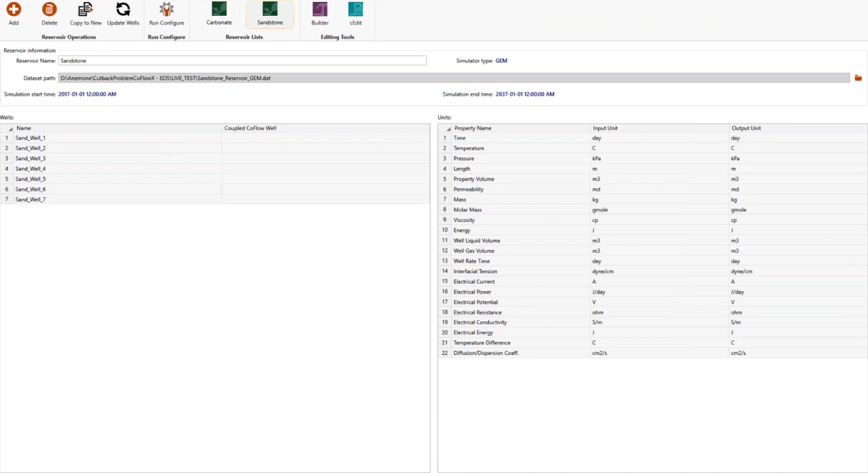Then you just go into the engine and you literally pick the starting time and ending time for your coupling. You may not want to do it throughout. You may want to do it for only the forecast or only for a few years, and you can pick that, and CoFlowX will take care of the rest.

You can pick a frequency, how often you want to do coupling. Here I'm saying that at the max, I want to do it every 2 months, but maybe I want to do it more frequently than that, and that will be determined by my events happening on the reservoir and production side. And then I just click on start and we start running CoFlowX. So I already have run this case and I have results from it right here.

So when you start running your case in CoFlowX, it starts transferring this information which I was showing in the slide earlier. So I have Carbonate well 3. So let's look at this one well. At time 0, I'm passing some IPR information, which is the 2 curves at the bottom. The left-hand side curve is for water and oil IPRs, and the right-hand side curve is for the gas IPR, because predominantly liquid wells are different from predominantly gas wells. So we define different IPRs for the two of them.

So my IPR at the beginning is here, and the intersection point of IPR and VLP is this star that I've highlighted. And as time goes by, my IPR keeps changing, and CoFlowX makes sure that the right IPR is transferred from GEM over to CoFlow. And on the other side, CoFlow is transferring the active constraint, the rate at which the well can flow, to GEM, and GEM takes care of that and uses that for the next time step.

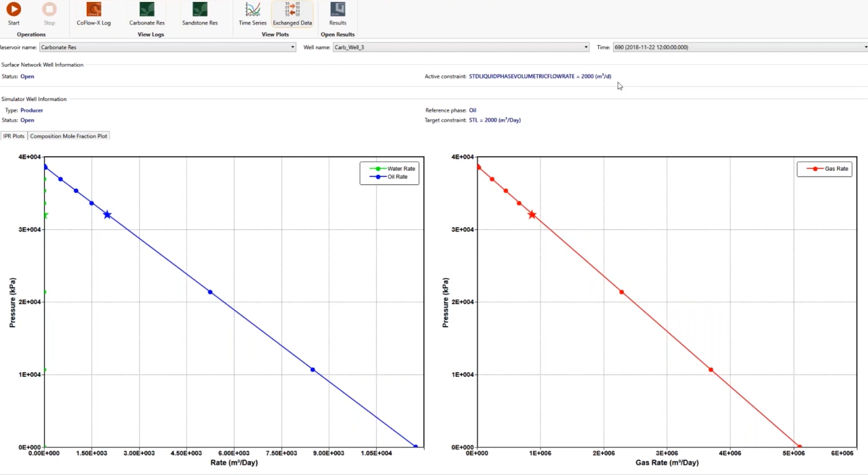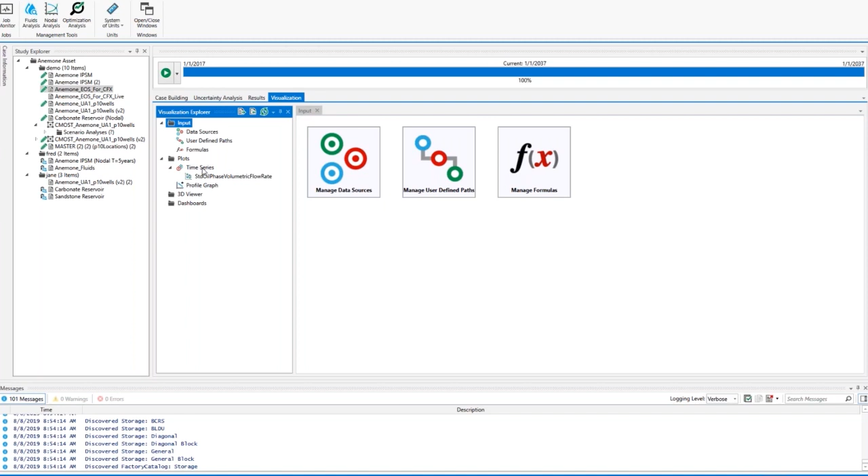So I can go in CoFlow and look at my results from this simulation as well. If I want to look at something specific for facilities, I can go in here and look at, okay, how much was the flow coming from the Sandstone and the Carbonate reservoirs? And this is a different model than the one I showed you before.

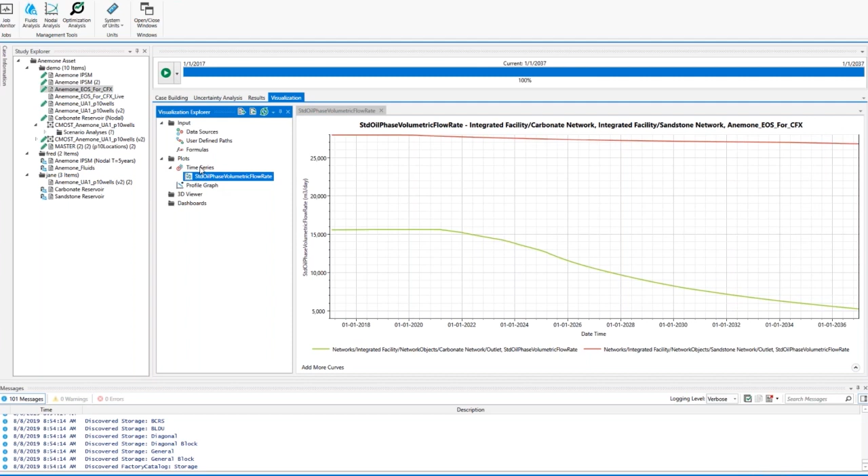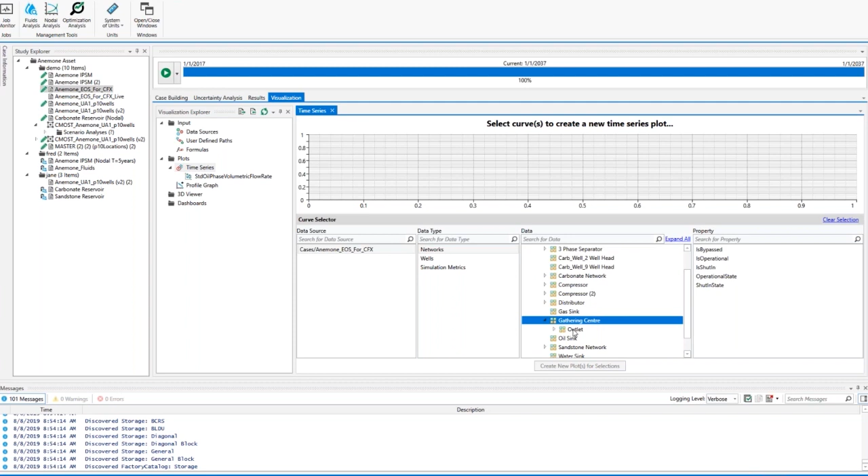So it's flowing 26,000 meter cubes from Sandstone and 6,000 from the Carbonate. And once again, I can go and look at any network properties. So I can look at Carbonate facility and a network object from this. I can pick up anything here, network, or maybe I look at the integrated facility, maybe that's better, and look at the gathering center and look at the temperature coming out of this throughout the simulation life.

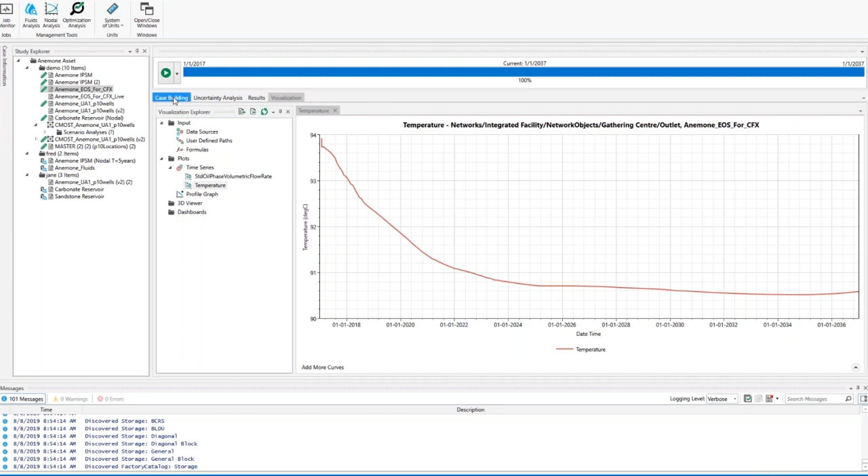So you can see at the beginning, I'm coming at about 94 degrees. Towards the end, I'm about 90 degrees. So that's good enough. Hot fluid is coming in and mixing it in the FPSO. So I can evaluate whatever I want. I can do the same analysis I did in the previous study, but this time using CoFlowX. So with that, I finish my introduction of CoFlowX, and I go to my next topic.

Well, first of all, I'll summarize CoFlowX for you. So CoFlowX, as you saw, it's a modern user interface, and you can couple reservoir and production models very easily. Typically, this is done by using tedious scripts, which only a few people understand in traditional tools. And now with CoFlowX, you don't need any scripts. It's going to do everything for you automatically. It is very easy to use.

You don't need to do any changes in your data set. You can just bring in your original IMEX and GEM data sets. No need to remove the well and recurrent section. No need to remove any triggers. No need to do anything at all. It's a smart software. It has automatic well coupling, and it intelligently selects the right coupling time. And there is no limit on how many reservoirs you want to use. You can use 10 IMEX, 5 GEM, and any kind of combination, like 5 IMEX, 20 GEM models, whatever you want. There is no limit at all.

Now I come to my next topic, that is the offering of CoFlow and CoFlowX on the cloud. All our CMG software is available on leading cloud providers in the world. And by doing that, all you need is a computer with an internet connection, and you can connect to any of our software. And that includes CoFlow and CoFlowX now. The benefits to you are that it's an instantly scalable system, and the hardware is very flexible. So you don't have to go and buy expensive computers, and still you can use the most advanced computers that are there in the world on the leading cloud providers.

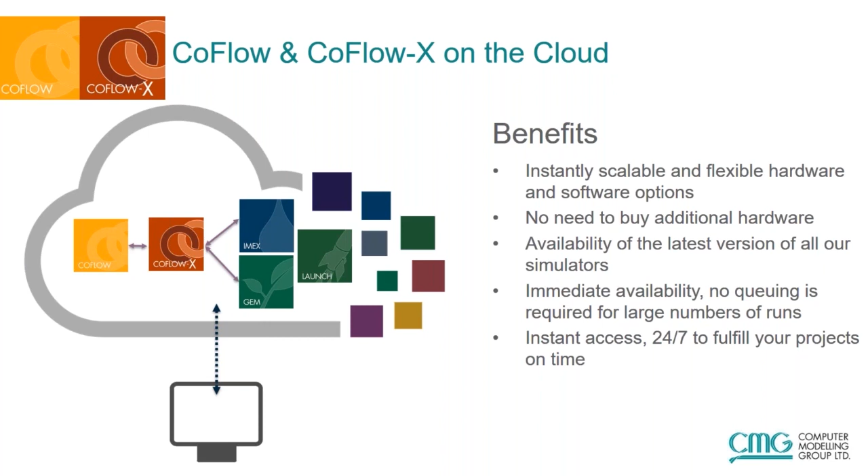And I want to show you how easy it is to use CoFlow and CoFlowX on the cloud. So here is my login screen for CoFlow and CoFlowX. You have to register to the cloud provider, and then you get a username and password, which I have, and then you open and you can access CoFlow. I've already logged into the system, and you can see the study I showed you earlier, the same look and feel of CoFlow as you would have in general, as if you were running on your own desktop.

And the same thing, you run the cases, you analyze the results, you do whatever you want. So there is no difference in running CoFlow on your desktop or your laptop versus running CoFlow on the cloud. You get the exactly same experience.

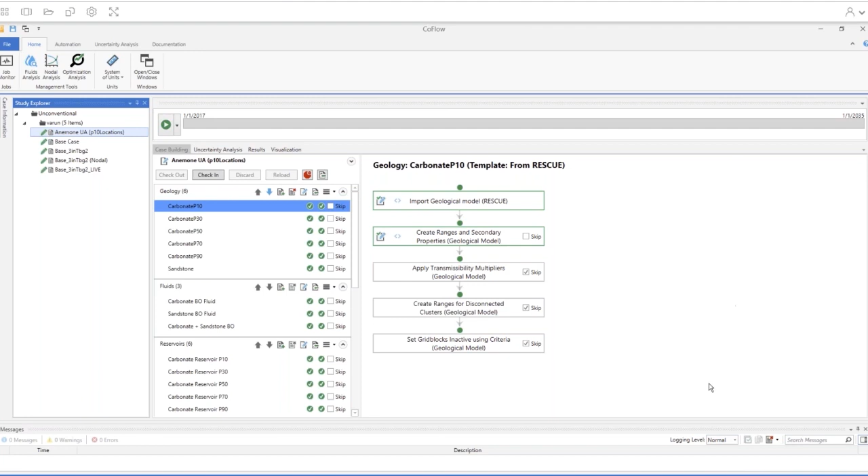But we also have deployed CoFlow for several onshore locations, especially in South America and in the Middle East. So CoFlow has already been out there, and people have been using it for making business decisions for the past year or so.

The bottom line is where I conclude my presentation. What I showed you is CoFlow and CoFlowX, and using these two tools, you can get all your IPSM needs met with a single software solution. You can model any recovery mechanism in your reservoirs, and you can do any kind of production design optimization for the production side of things.

Now you can solve complex problems in a new way. You have a choice of using implicit or explicit solution, and either way, it's a multi-user, multidisciplinary collaboration that is not present in any other tool. You can solve problems that we previously could not. An end-to-end uncertainty assessment and optimization is something which we have been aspiring to achieve, but haven't quite been able to achieve in traditional ways of IPSM solutions, but now you can do it.

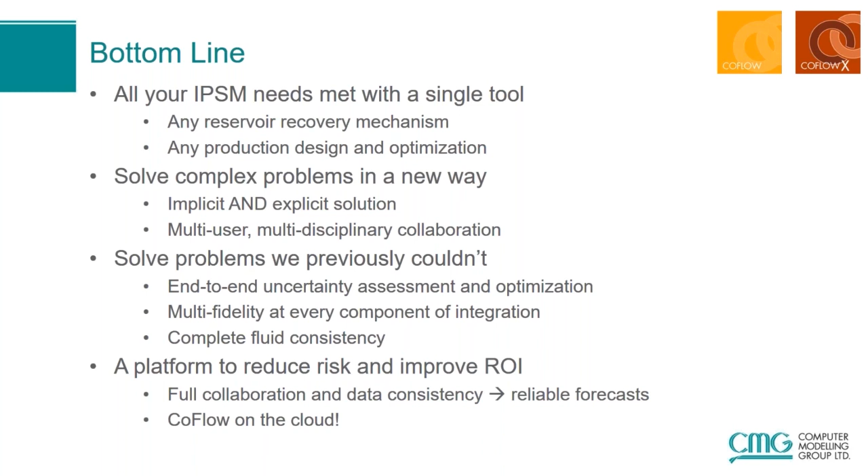The first question is from George Ramos, and the question is, talking about IPR curve using CoFlow or CoFlowX, are you able to calculate the average pressure in the well drainage area? Now, I'll take up that question. Actually, since CoFlow uses the reservoir simulation models, even CoFlowX, it has access to the real-time drainage radius around each of the producing wells. So it intelligently allows CoFlow to take on the drainage radius and use that information in the nodal analysis

calculations. Traditionally, in a decline curve situation, users have to input an approximate drainage radius that may not be that accurate. But since CoFlow has access to the pressure profiles around the producer as well as the drainage radius, it uses the correct drainage radius for the calculations.

The next question is from Chad, and the question is, what is the tool for modeling flow in the well? So the answer to that is CoFlow. CoFlow is the well modeling software, whether you are using CoFlow or CoFlowX, and it takes care of all the completions that you want to set up in a well, smart completions, artificial lift, anything like that, that is done through CoFlow.